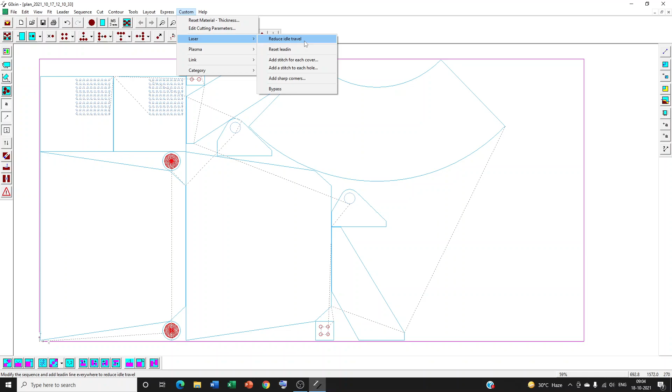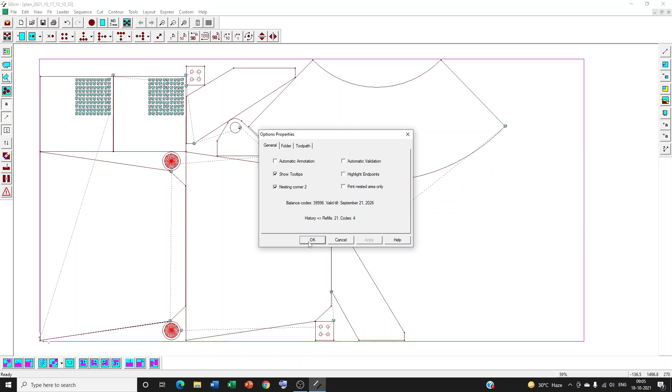Now how do you see the sequence numbers? Go to options, go to general options, turn the tool tips on, and just position the mouse on the boundary of any cycle.

So here you can see the sequence number is 262 in line number 2, and if you go here, that is sequence number 225, and see the line number 3, it is called line mark. So it's a marking contour, it's not a cutting contour, the red color line that you see on your screen here. And if you see here, you will see sequence number 204, and that's a drilling cycle, as you can see in line number 3.

But suppose you want to see them in action, in which sequence they are taken up. For that, you have to press the button F3 on your keyboard twice.

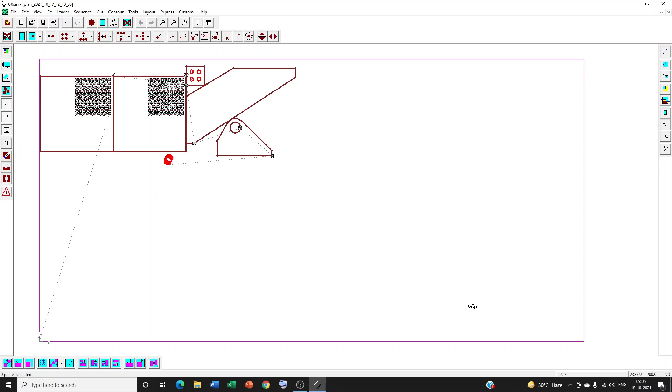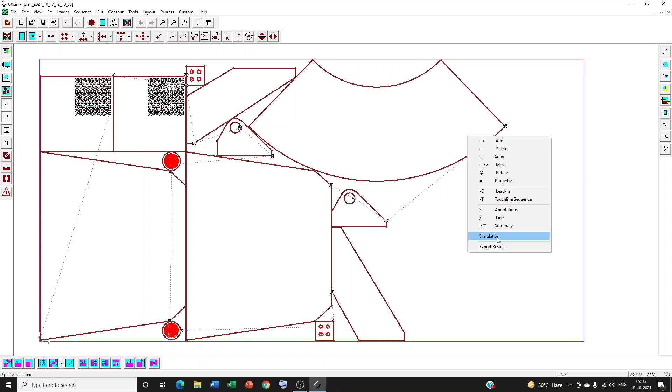If it is too fast, then you can go slow on the simulation by right-clicking and going to the option called simulation. Buttons will appear below.

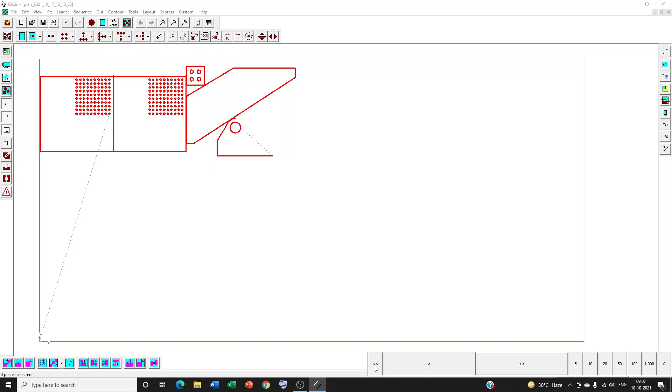As I said, once again you can generate the cutting sequence and lead-in lead-out for the entire layout using this option, laser reduce idle travel, for laser cutting operations.

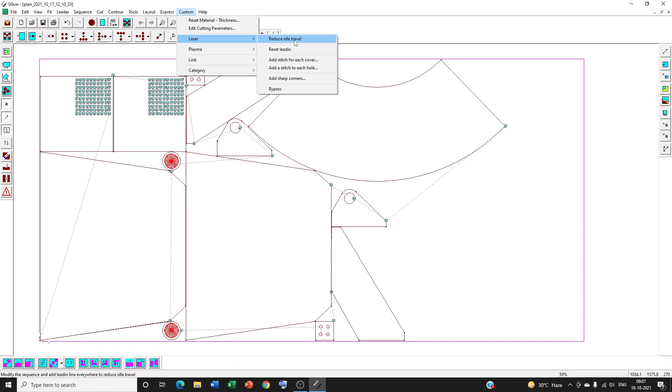Now, if you want to do the same thing for oxyplasma cutting, you can use this option under the custom menu. Here too you are given the option to change your sequence and lead-in lead-out together. And as I said, the simplest option is here.

Go to sequence, auto sequence. Now, there is one more method.

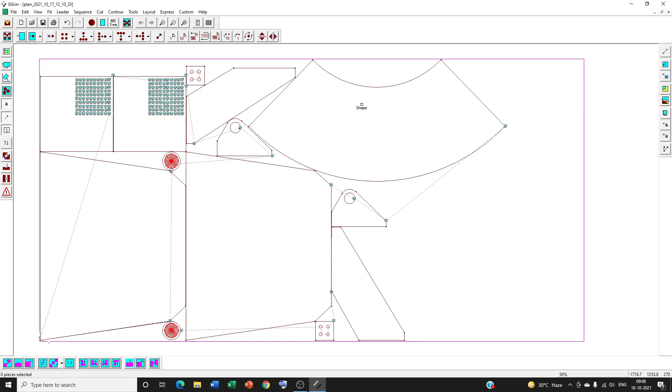For example, if you have generated a layout in the form of an X and Y grid, something like a matrix, something like a regular repeat of components, let's set it up in this manner.

I'm deleting these components, removing this, and making an array of this.

Now in this case, it may be helpful to generate the sequence along the X and Y axis using this option: Sequence, simple sequence. Here you will find many options.

Keep clicking through them, and below you will get the estimated rapid motion length. Choose the option that gives you the minimum estimated length of rapid travel and see how it goes.

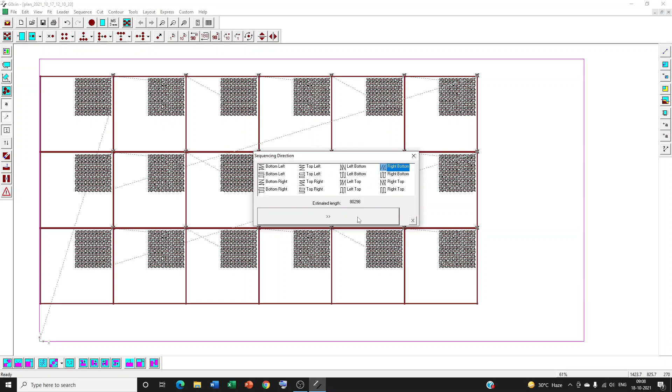The sequence would be regenerated. If you play it, it will be shown on your screen in the quick simulation by pressing the F3 key, like this.

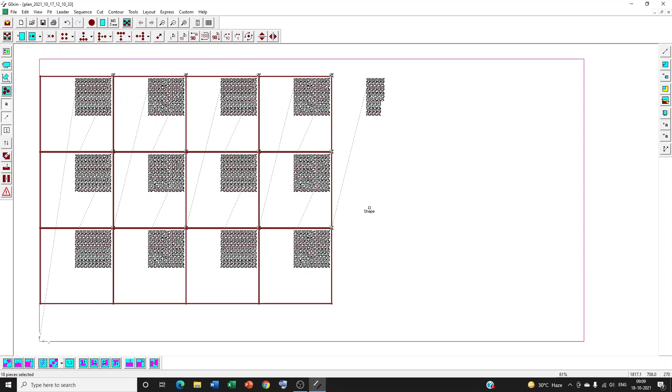Finally, let me show you a very specific case of sequencing where you may want to sequence the processes, such that all the drilling operations are performed first.

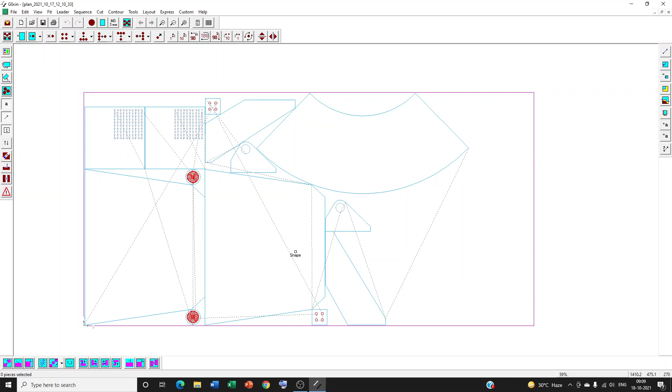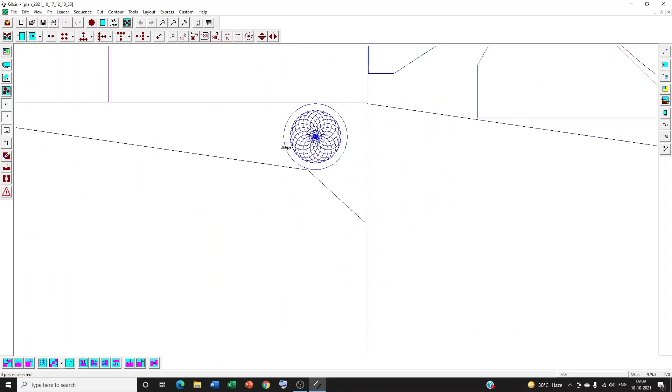These are drills. Then you may want to carry out the marking operation for the entire layout present in this component. Here also you can see some marking circles. And then you want to take up cutting contours.

So what you are trying to do is complete all the drilling operations first, then carry out all the marking operations for the entire layout, and then handle the cutting cycles for the entire layout.

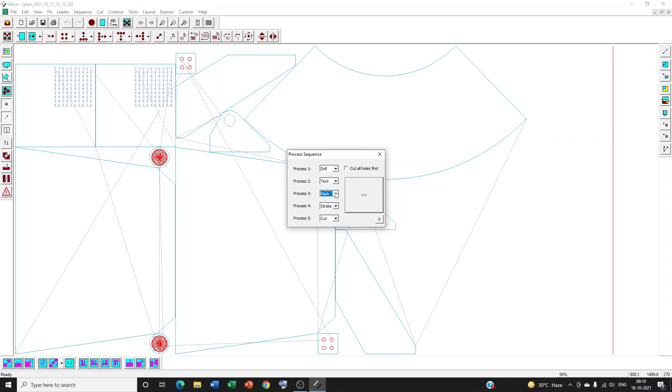That is called process priority. Go to the express menu, click on process priority, and specify your options: drilling, marking, and then finally cutting.

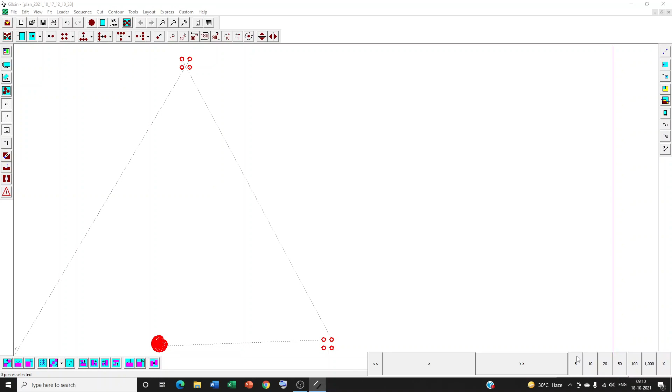Now if you simulate — this is too fast — you can see the drilling operations are carried out first, then marking operations are carried out, and then the cutting operations.

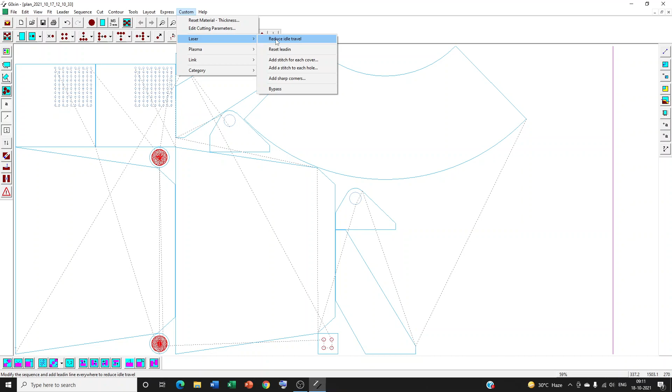And so on. So these are the main options for generating cutting sequence automatically: this is auto sequence, this is simple sequence along the XY axis, this is the option for generating sequence as well as lead-in lead-out for the entire layout for laser cutting, and a similar option for oxyplasma cutting over here.